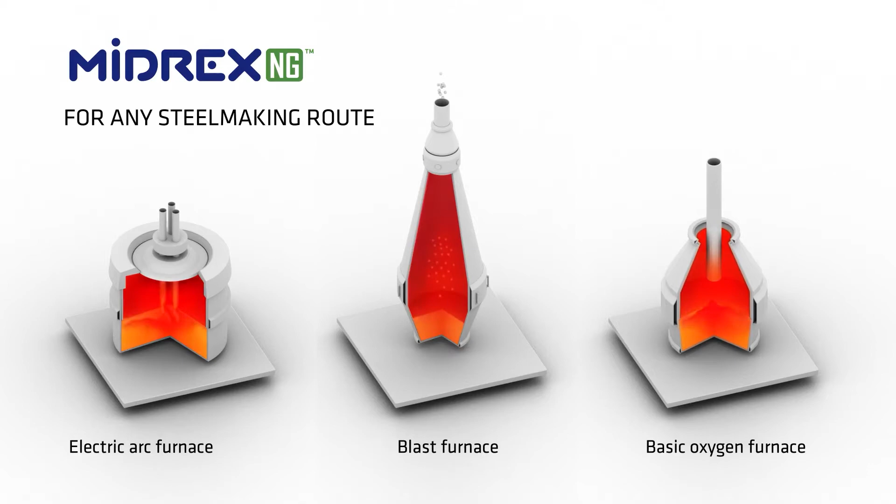A brief description to understand the picture. It is no secret that there are fundamental commodities on which all human civilization rests: oil, gas, coal, steel, and others. The existence and development of civilization as we know it today are impossible without them. This makes such commodities extremely marketable and constantly increasing in price.

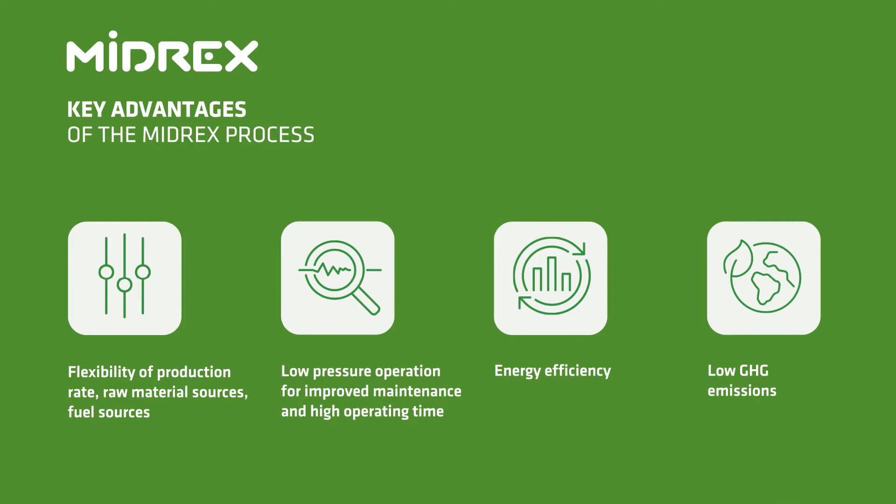For example, global steel production is only going to increase, and the price of steel is going up. Global steel production has doubled in the previous 15 years. Steel is smelted with expensive coking coal, electricity, and gas. Naturally, prices rise every day, and the non-renewability of energy commodities makes the price of steel higher every year.

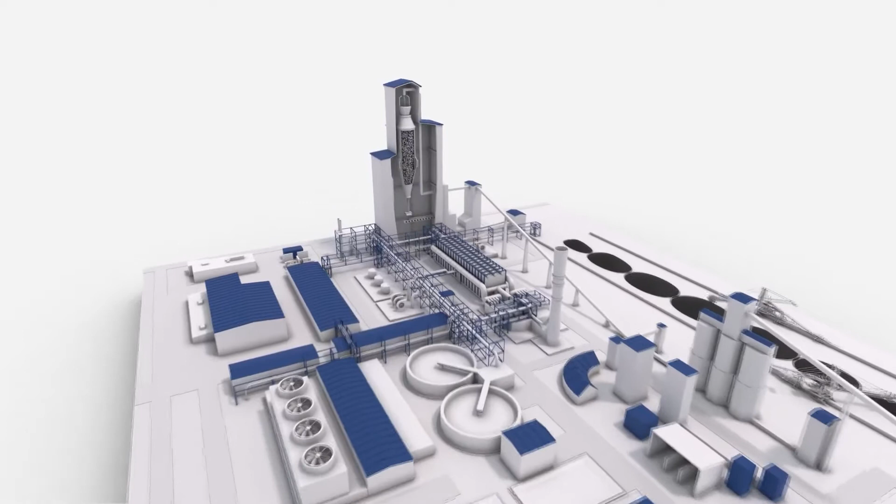I want to talk about an extremely closed subject, in which very few players are active, and which, like a carrier rocket, throws its owner upward financially, like all the famous oligarchs who somehow took possession of the metallurgical enterprises, and now Forbes writes about them.

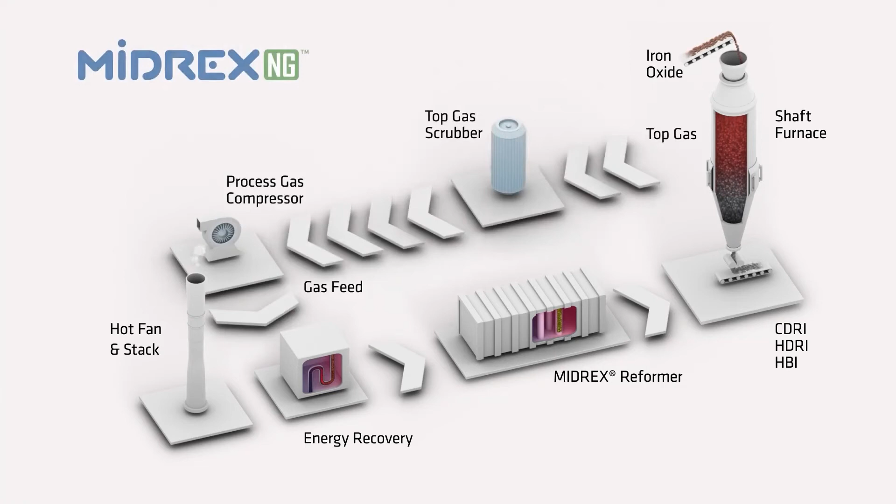Direct reduction iron is used exclusively in electrometallurgy as a raw material in steel production. It is a direct and very serious competitor to scrap metal and cast iron. In metallurgical literature, this method is considered one of the most promising directions for effective development of world metallurgy.

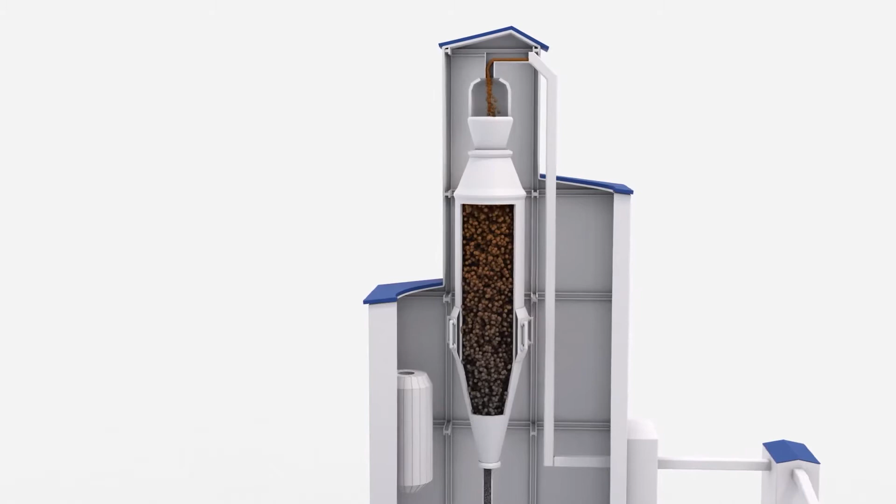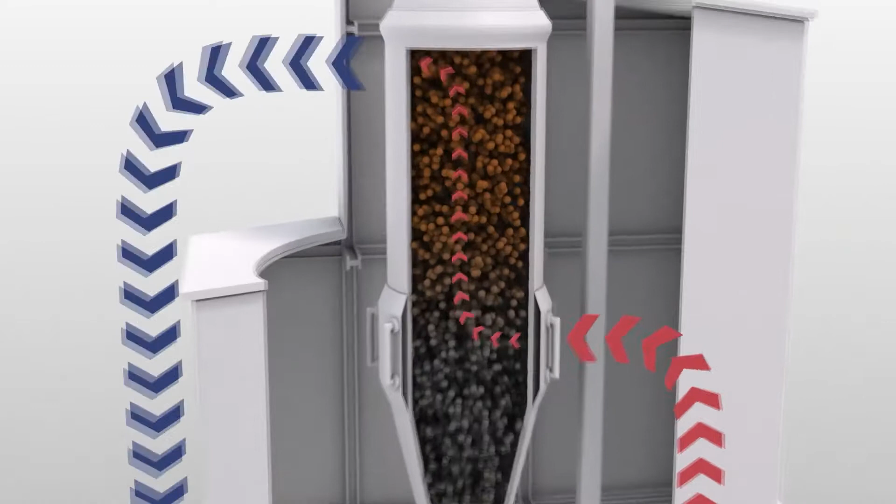Why? It is known that the use of iron reduced in this way during steel melting in electric arc furnaces allows production of the highest quality, cleanest metal without harmful impurities, suitable for use not only in standard industries but also in high-tech.

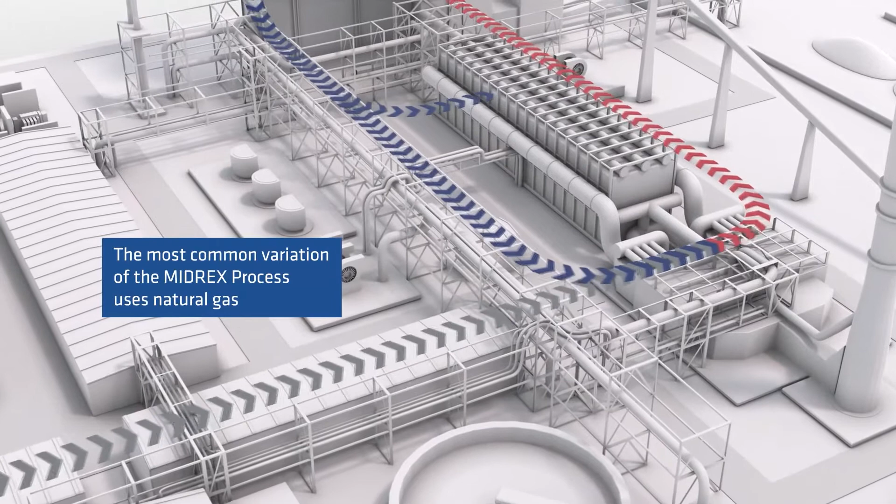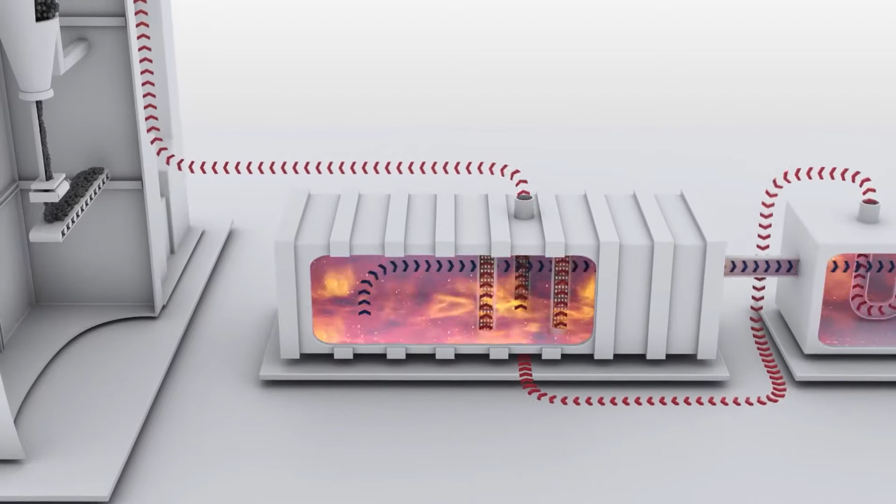I liaised with a man dealing with this closed subject for a certain period. He focused on extracting precious metals from mine rocks and slimes. While others passed by the waste heaps, he analyzed their composition. For example, one day he stumbled upon a useless waste heap, which, according to his analysis, had a high gold content.

He immediately bought and recycled it, making a fortune. In the process of our communication, he bought one of the sludge pits, from where he started to extract valuable metals. As for direct reduction of iron, we tried to create a program for the reduction of fine iron oxide with generator gas. But neither he nor I understood the relevant technology at that time.

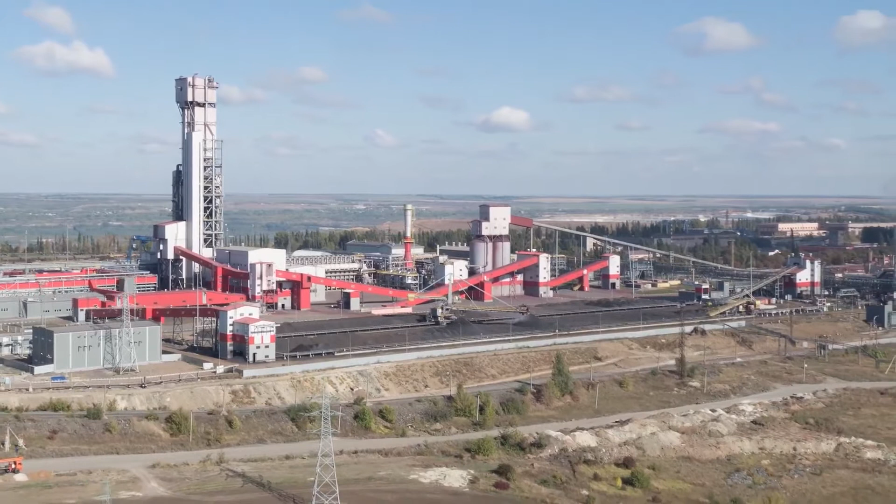All he was able to find was a place near Kryvyi Rih where iron oxide came in wagons to be processed and came out a finished product after reduction. Somehow he managed to negotiate and found out that it was a furnace operating as a tunnel brick kiln, where pots of metal were driven on carriages and fired in a gas environment.

No one was allowed in, not even to look at the facility. The subject was quite closed and profitable. In the end, my acquaintance left for the sludge pit he bought, and everything remained at the level of words.

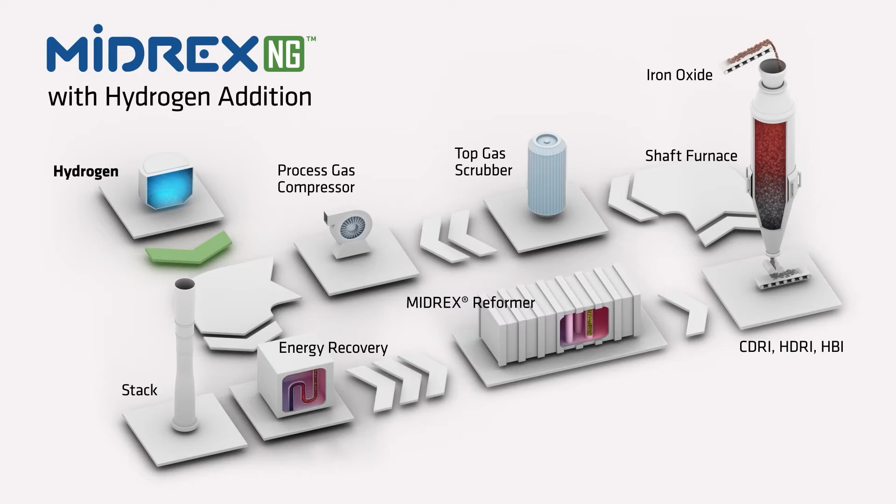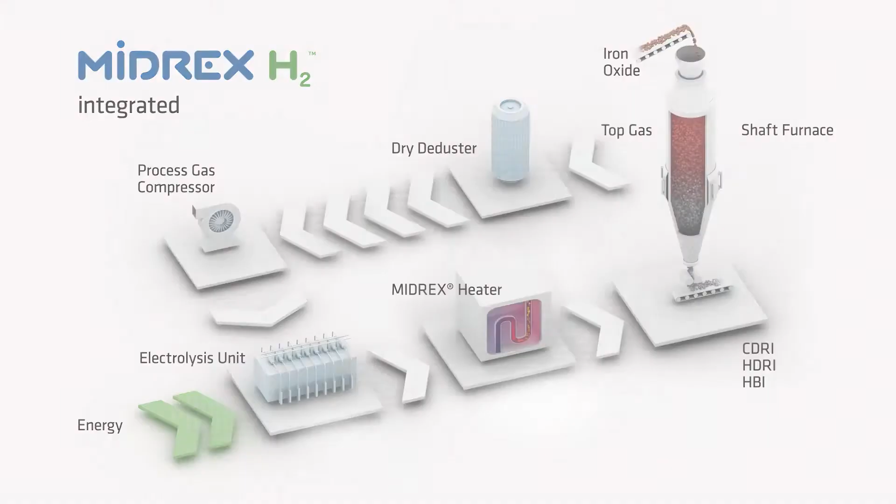And so yesterday, digging out something interesting from my channel, I came across an article about how this subject was dealt with in the West. A fluidized bed gasifier was in fact used to directly reduce iron there. I decided to make a video about this article, which I present to the public. And this video is also an attempt to find interested persons who would like to work on this matter.

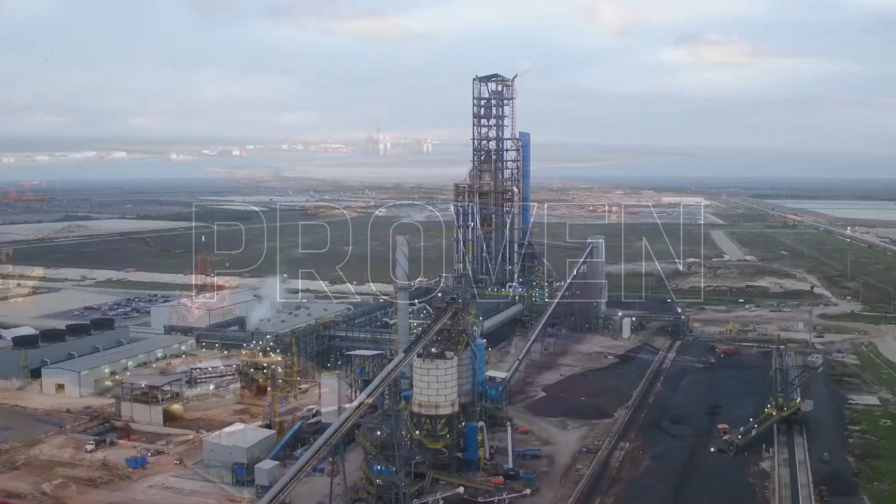A little more about the process itself and then about the facility described in the article. Direct reduction of iron is its reduction from iron ore or pellets using hydrogen and carbon monoxide, essentially generator gas, or ammonia and solid carbon.

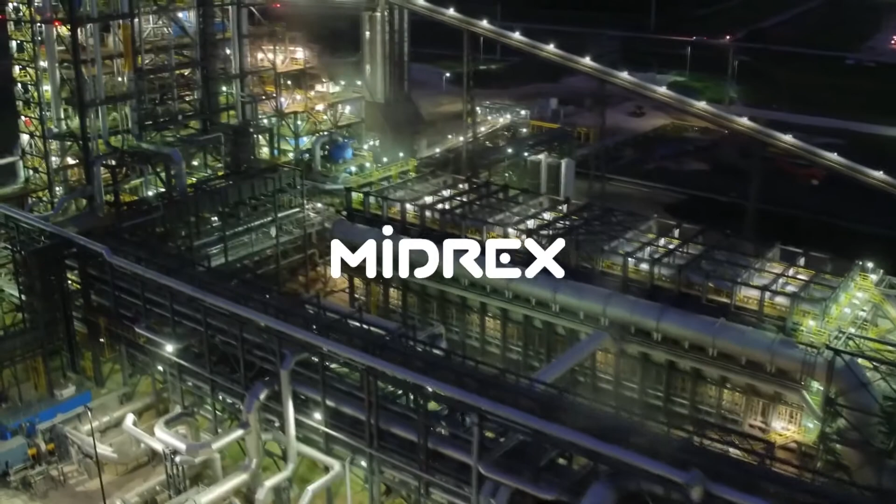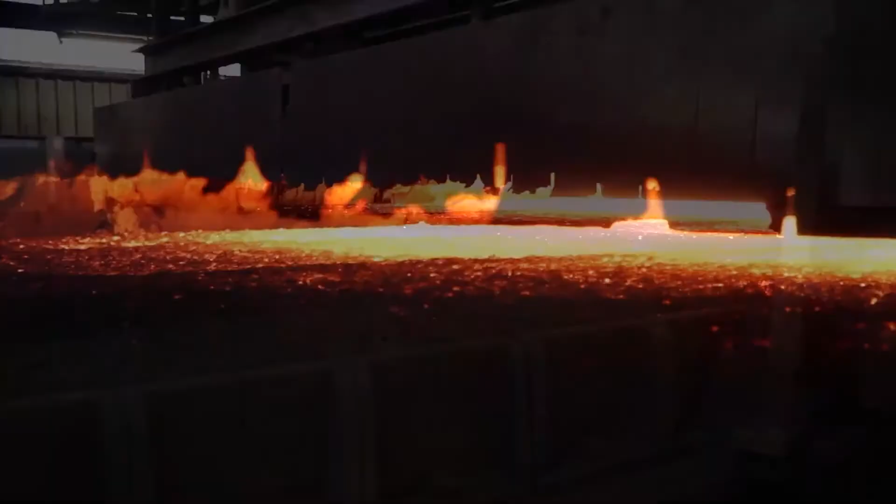The process itself takes place at a temperature of 1000 degrees. Such terms as metallization, partial metallization of ores, direct production of iron, direct reduction iron metallurgy, and coke-free iron metallurgy are also used in reference literature. The product of the process is called direct reduced iron.

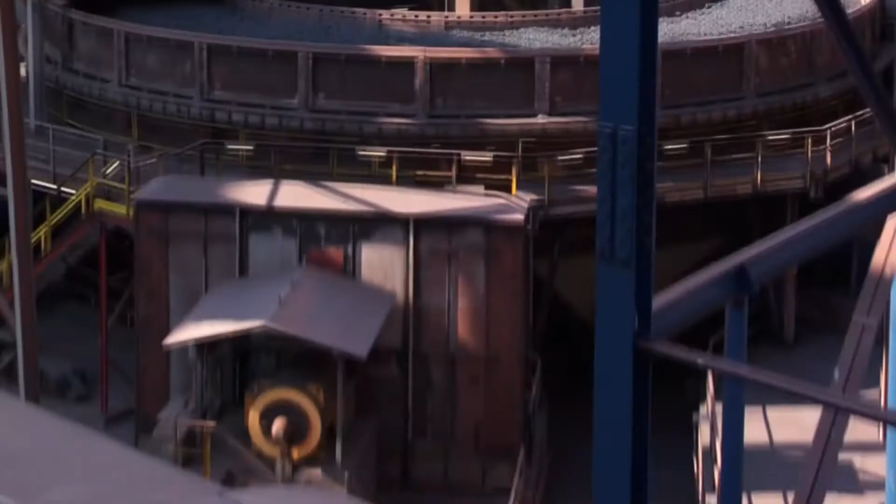Attempts to obtain steel bypassing the blast furnace process were made in the USSR back in the 1950s. Industrial production of iron directly from ore, bypassing the blast furnace process using coke, appeared in the 1970s. The first direct reduction plants were low efficient, and the final product had relatively many impurities.

The process began to spread in the 1980s when large-scale natural gas began to be widely used in the mining and metals sector. The gas was ideal for the direct reduction of iron ore. In addition to natural gas, it was possible to use gasification products of coals, in particular lignite, associated gas from oil production, and other fuels acting as reducing agents in the direct reduction of iron.

Technological changes in the 1990s made it possible to significantly reduce the capital and energy consumption of various direct iron reduction processes, resulting in a new leap in outputs of direct reduction of iron.

Now, while making this video, I managed to find analogs of this technology in world practice. These are Midrex and Finex companies.

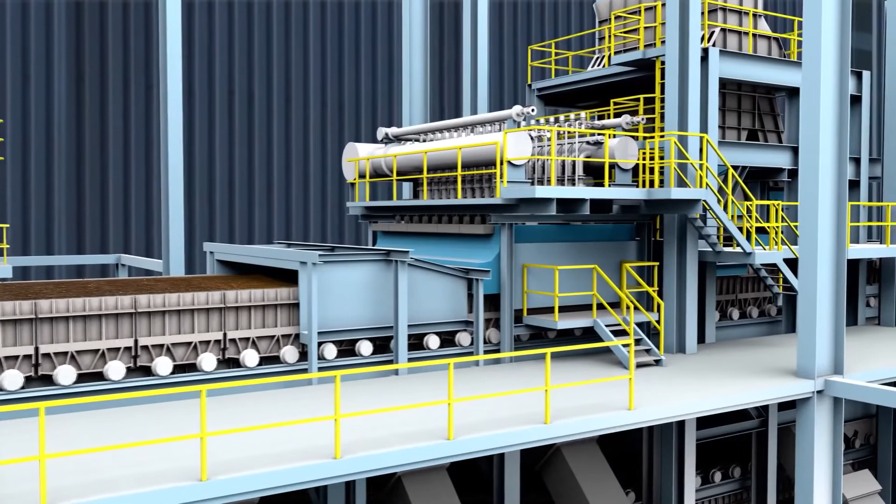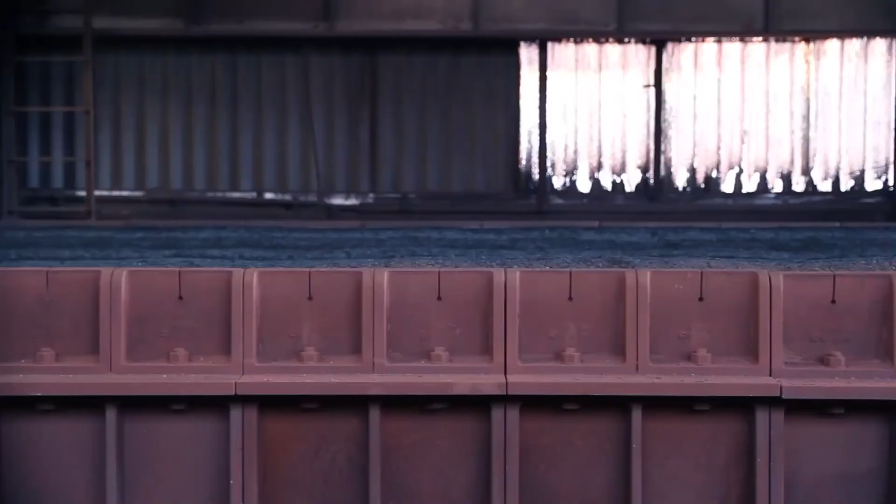What happens is that iron ore fines, which make up 80% of the total amount of iron ore, must go through a preparation stage, i.e. the process of pelletizing and sintering, in the blast furnace process. On the contrary, fine iron ore can be directly loaded into the reduction process when using fluidized bed technology.

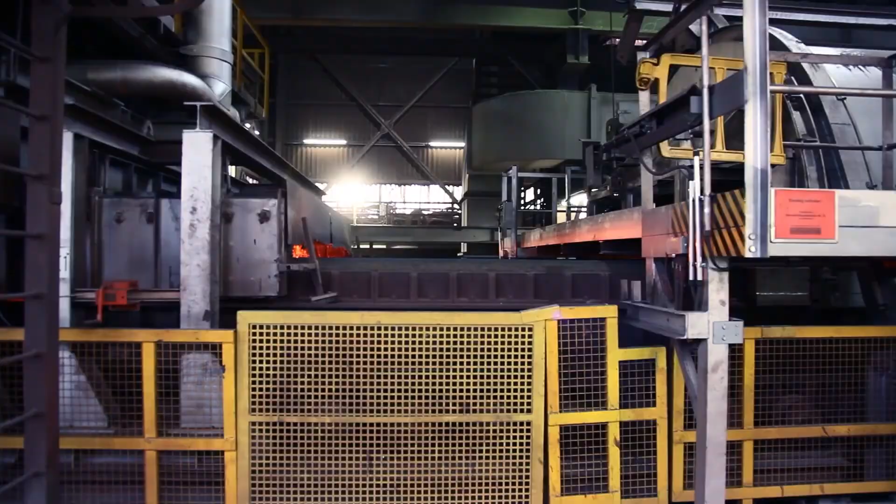This method produces iron of the same quality as traditional blast furnaces but avoids coking and sintering of fine-grained ore. The loaded iron ore passes through fluidized bed reactors where it is heated and reduced to direct reduction iron. Then it is loaded into the melter gasifier, where the final reduction and smelting take place.

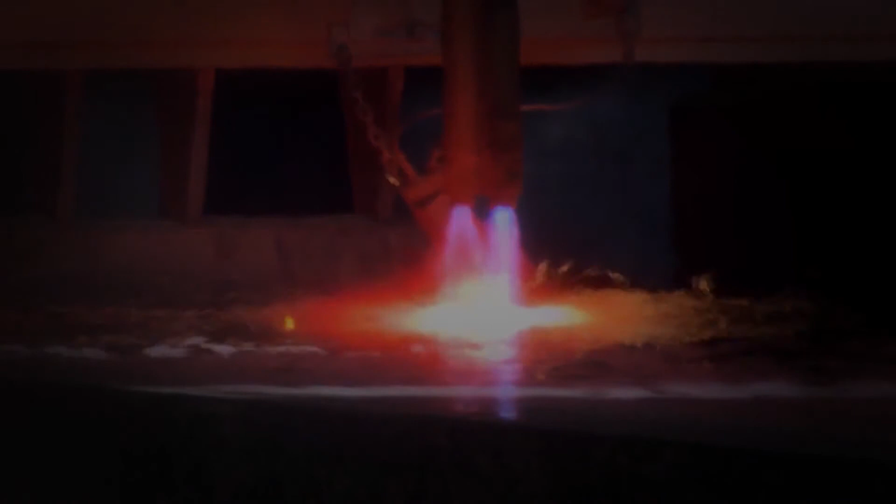Generator gas is produced in coal-fired gasifiers by feeding them with oxygen. Another advantage of the process is the waste combustible gas, which can be used for heating in a steel mill or to generate electricity.